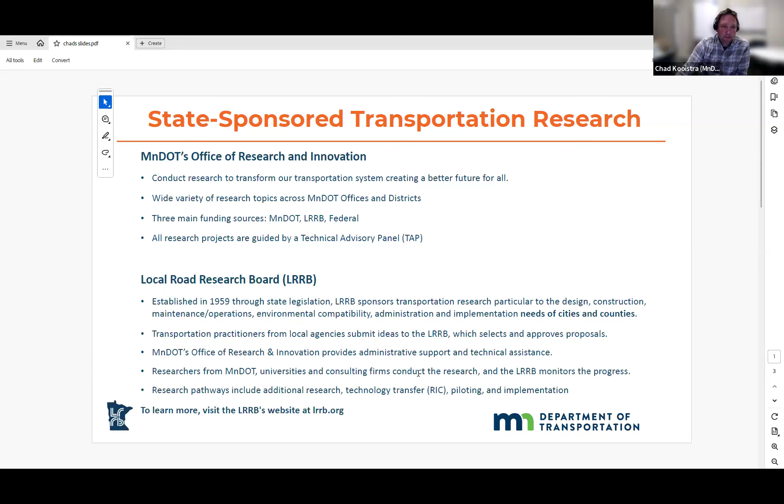Oh, okay. It could also lead to piloting and implementation. You can see more information at LRRB's website down there, and I'll put a link in the chat with that too.

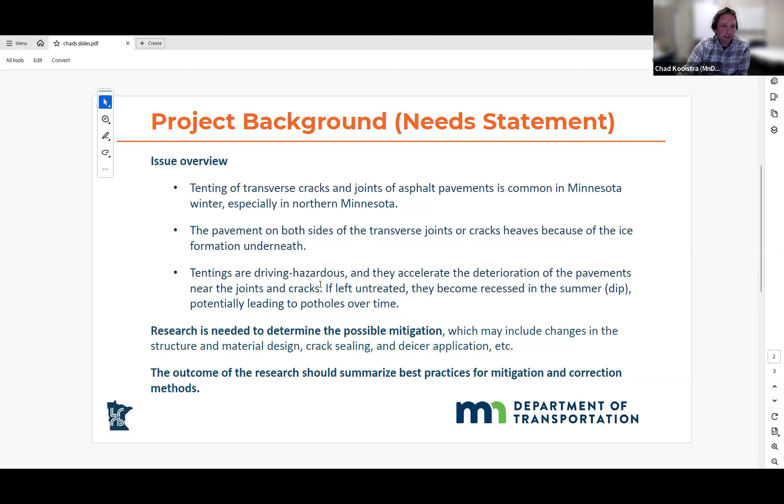This is just an example of, I won't go over this as Kristen covered it, and I'm sure the next 2 speakers will as well, but this project started as a need statement submitted to LRRB. And this is just the language from that need statement. So it gave an overview of the issue, stated that research is needed to determine possible mitigation, and then stated the outcome of the research should summarize best practices for mitigation and correction methods. So this was the need statement that was put in, and Professor Barman's team received the project.

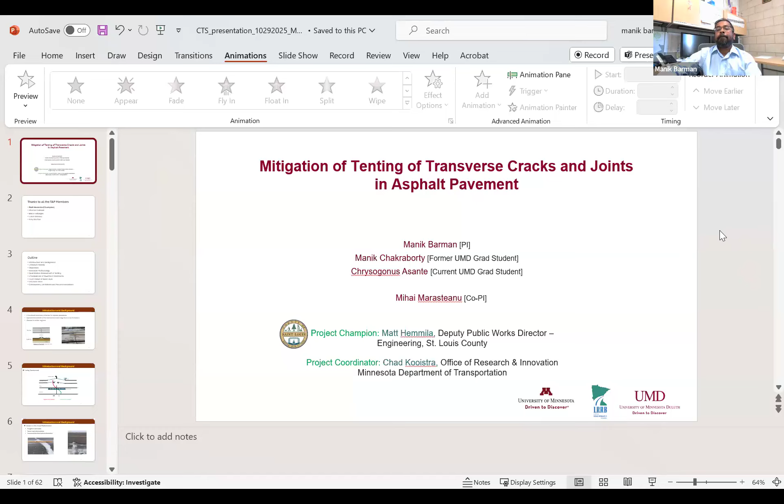So yeah, thank you very much for inviting me to speak on this particular topic, which we have been working on for more than a couple of years. I'm Manik Barman, a professor at UMD in the Civil and Environmental Engineering Department. I have two graduate students working on this project, and also Dr. Mihai Marasteanu from the Twin Cities campus is a co-PI. So his group also worked a little bit on this project.

Matt and Chad already introduced themselves, and they are heavily involved in this project. I'm not repeating the title because we already discussed it. I would like to thank all the TAP members who have been helping the research team in this project, timely reviewing the task reports and giving whatever suggestions we wanted from them. They have been very helpful.

So I'll start with a little bit of introduction and background, because we already heard some background about this project, so I may accelerate on these. We'll see a little bit of literature review, the objectives, research methodology, quantitative assessment of tenting, effectiveness of pavement treatments, and then frost heave of the base layer, decision trees, and then some conclusions. I would like to mention that this is an ongoing project. This project ends in March next year, so we have some tasks we are still working on.

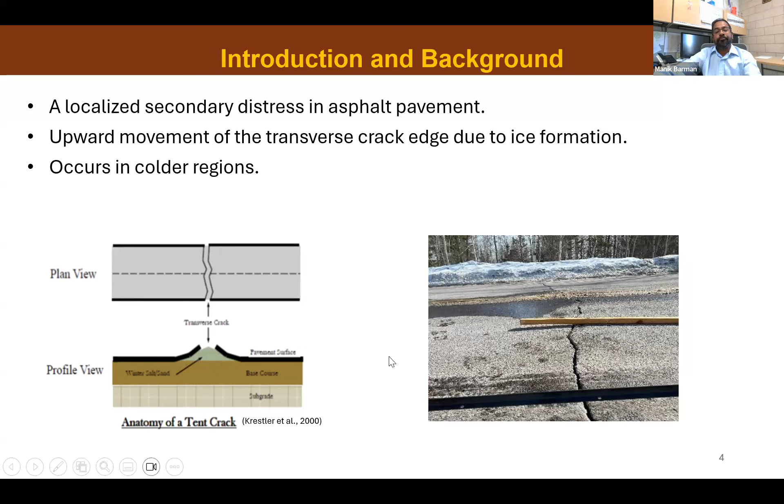So a little bit of science behind it. In pavement, if it is cracked, the water infiltration occurs either from rainwater, which goes in and then accumulates, and if it doesn't drain away, it can stay there. The snow melted water, the snow mixed with the de-icer that we use in Minnesota, that can go also based on the temperature gradient.

So in the winter, the top of the pavement is colder, right? And the bottom of the pavement is warmer. So moisture generally flows towards the low temperature region. So in this case, any water even below the subgrade can come into the base layer, okay? And then it can become ice, which can push the surface upward, okay? So this is a little bit of science behind the tenting development.

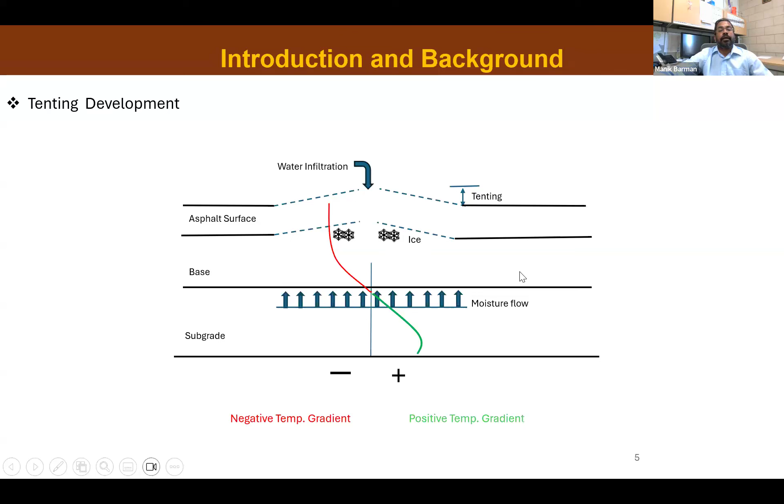Well, so the impact on the road performance, like all of us are familiar when we drive in the winter, we see that. So if we do not fix the crack, the edges of the asphalt pavement, if they are tented, they can break easily. The crack becomes wider, and potholes can form, right?

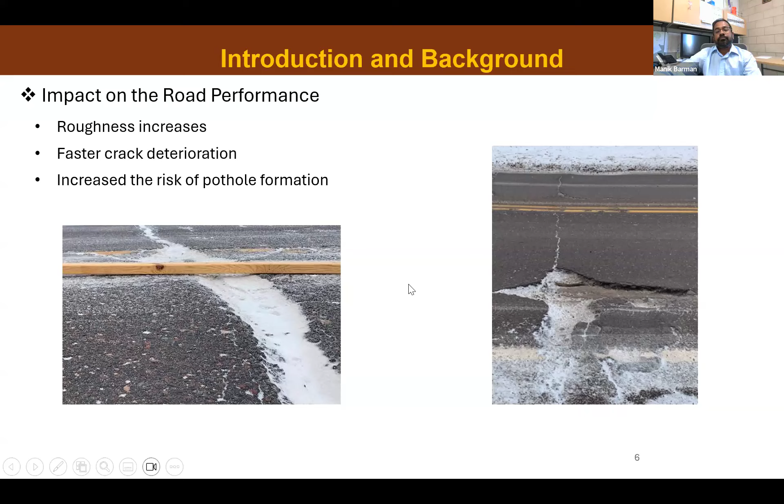So now some literature. This particular topic is not really widely researched. Probably less than 10 research papers or articles or reports we got in this area. So you can find hundreds of research in other topics, but this topic is not that researched yet. So infiltrated water, poor drainage, of course, these are the concern, these are the cause, and it's a near surface phenomenon. Near surface means near pavement surface phenomenon.

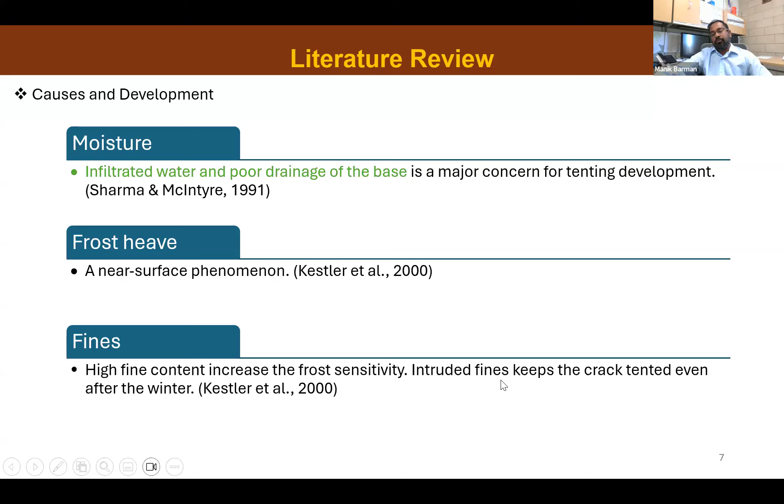High fines content increases the frost sensitivity, and the fines also, which go into the pavement through the cracks, they can also contribute to tenting. De-icing salt can also affect, because if the de-icing salt goes through the crack, the area by the crack will have more concentration of the salt, which will attract more moisture, which is a process known as osmosis, if you're familiar with that. So more moisture will be present, which can become ice.

Freeze-thaw cycles, of course, will affect. That's why in the early spring, when there is freeze-thaw, one day you see cracks are very tented if it is very cold; the other day, if the snow melts, then it goes down. And if freeze-thaw cycles are more, and if we have more moisture or the presence of snow, then tenting can go even more, because more water will come in.

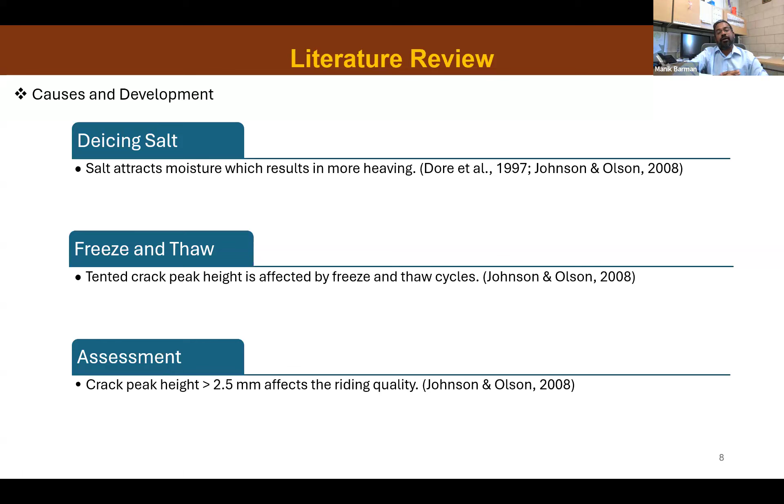Our colleague A.D. Johnson from MnDOT, and Roger Olson, a long time ago, did a study, and they found out that if the tenting height is more than 2.5 millimeters, it affects the riding quality. A couple more studies were done, one again at MnDOT. So what they have done, they measured tenting.

And then they also correlated tenting with the international roughness index. So the international roughness index, it represents, or it's a measure of, road roughness. A higher value is a rougher road. So as you can see, on the vertical axis it's peak height, or let's say it's tenting. So more tenting, more IRI. So there is a very good correlation, okay, with an R square equal to 0.62.

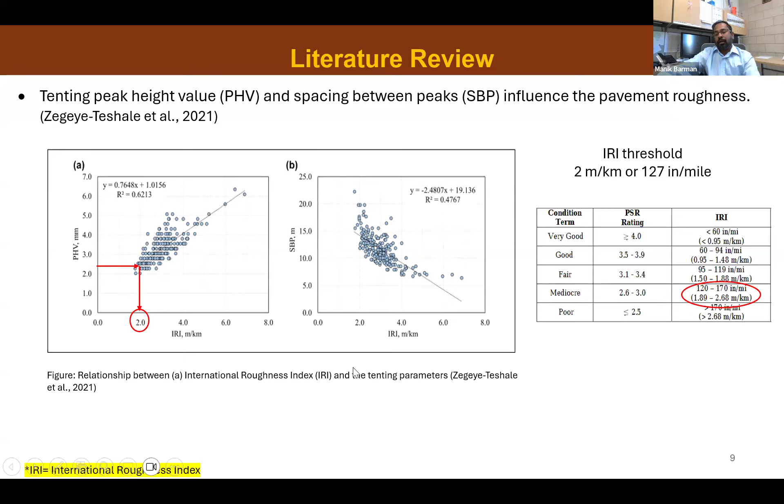So the objective of the study is, first, we try to understand tenting, how concerning it is, what kind of tenting amount. So in simple terms, a quantitative assessment of the tenting, how high they can occur, and if there are any variables that influence them. So we did that study. And then we studied the effectiveness of different pavement treatments that are used by MnDOT or in Minnesota by other counties or cities. And then we studied the materials that go into the aggregate base layer, which are susceptible to frost.

So we looked into that, and then we tried to see if we can change something in the base material which will decrease the frost heaving. Okay, and then based on these analyses, we tried to come up with some example decision trees.

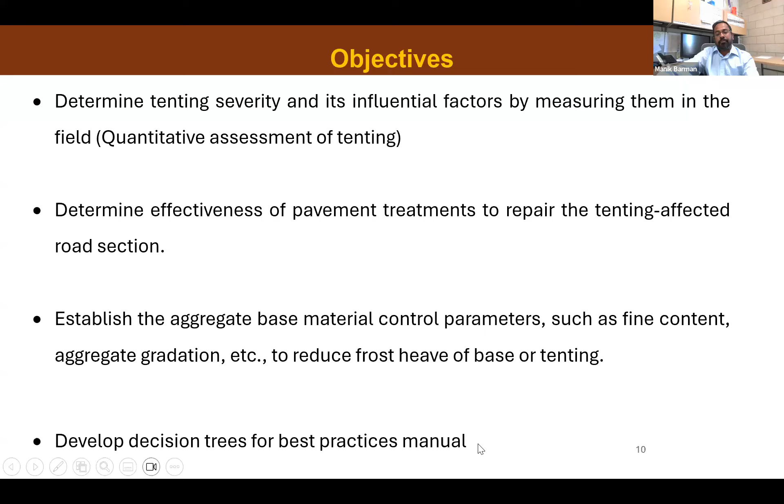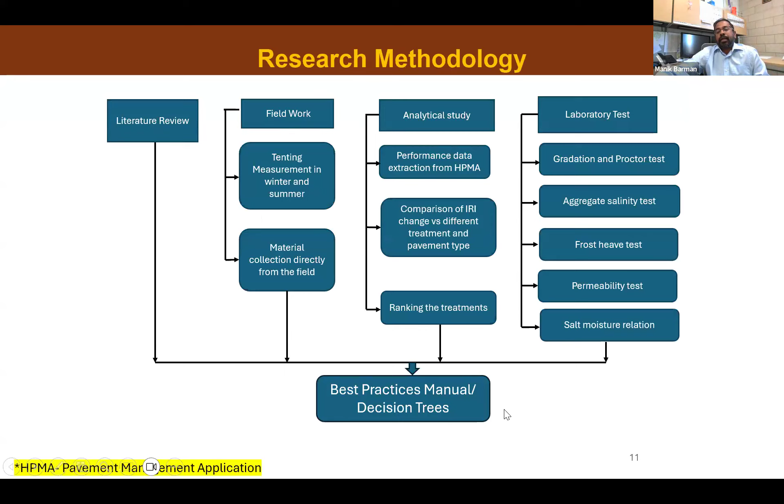But this, as I said, we are still doing some task, and this is the task. We just recently submitted a report, so the report is being reviewed by the TAP. So all of the results that I'll show are really preliminary. I'll not go through a lot, but this project had literature review, field work, some analytical study, laboratory test, and then eventually the best practice manual or the decision tree. That's our target. All right. So we will go through each one of those in this presentation later on.

So let's talk about the quantitative assessment of tenting. So we went to the field to measure the tenting, and also we used some data that is available from other research, especially from the Minnesota DOT, which my colleague Ayub and John presented in a paper in TRB. So I collected some data from that study too.

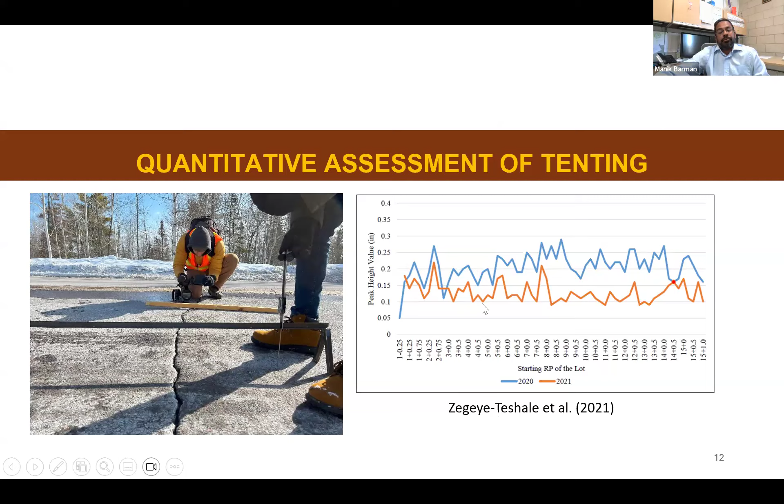So in order to measure the tenting, we really adopted a very simple method you can see here. We made this tenting measuring tool, like 4 feet long. And then basically we are measuring 3 heights, 1 height right in the middle of the crack or crack edge, and 2 other measurements on the flat road. And then we find out the difference between H3 and the average of H1 and H2. That will basically give us the tenting height. And then we took this measurement in 3 different locations for a single crack.

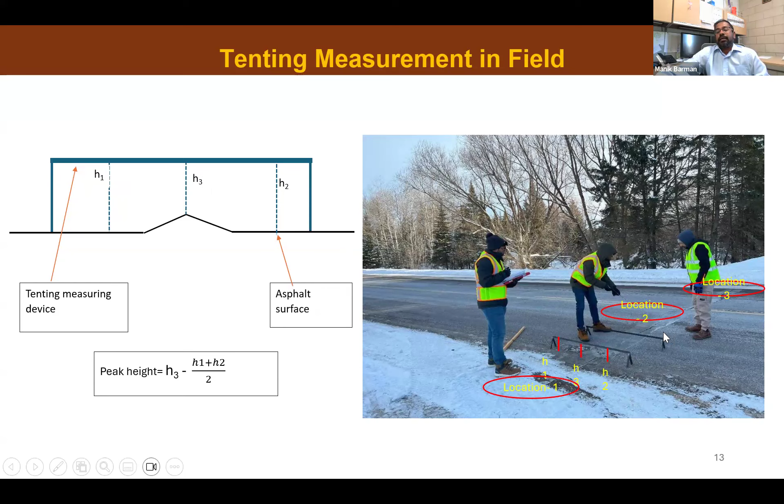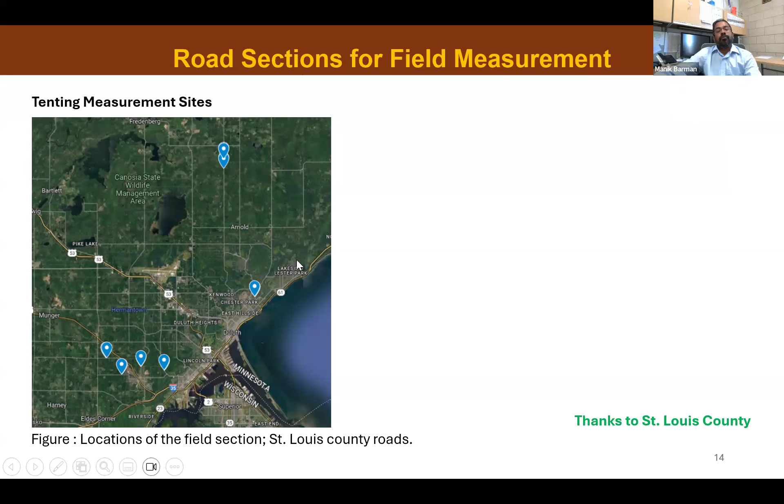And so with the help of St. Louis County, especially our project champion Matt and his colleagues, we got some sites to go and measure the tenting. So these are 6 different sections and their design.

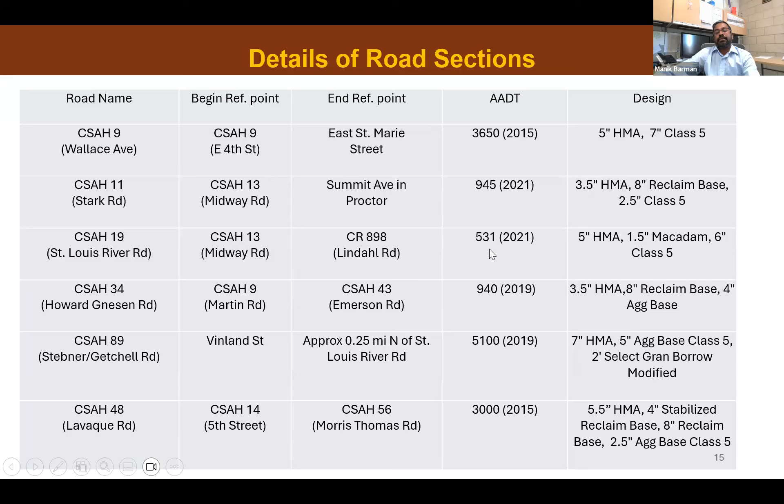All right. So I'll just read the last column. You can see we have very thin HMA layers, 3.5 inch to 7 inch HMA. Also the traffic varied from 3,650. Oh no, we have a 5,100 ADT as well. This is annual average daily traffic. Okay. So also 531. So this is kind of varied, and also the design is varied.

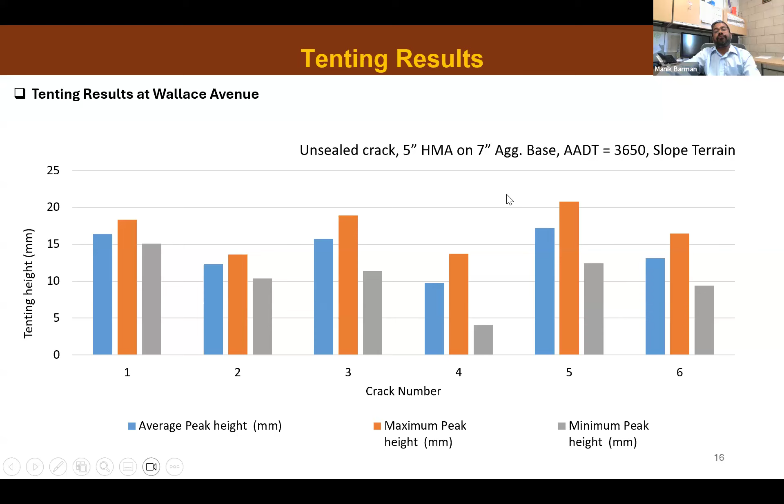If you're familiar with faulting in a concrete pavement, a 3/4 inch faulting in a concrete pavement is a lot. So in the winter, when we drive on an asphalt pavement that has tenting, the feeling is like you are driving on a concrete pavement that also has faulting. So in winter, you do not get a smooth ride on the asphalt pavement because of the tenting, especially in this part of the country.

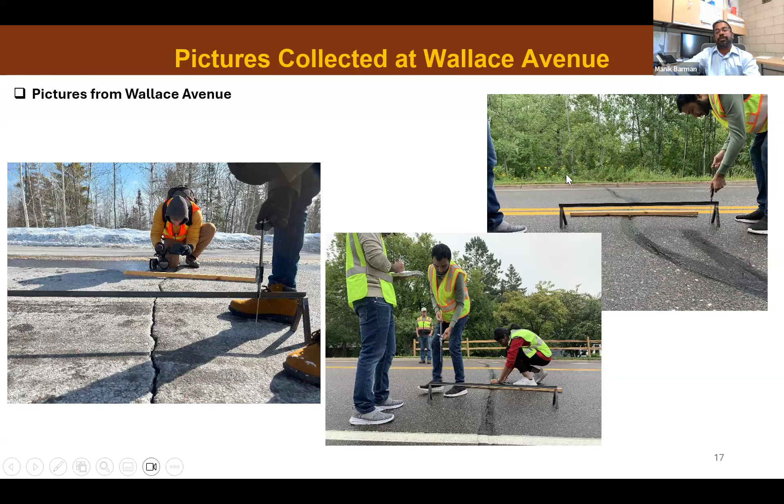So at this location, the pavement was really good except for the transverse cracks. And also it has a little bit of sloped terrain across. On one side it's downhill, on the other side the houses were a little bit up the hill. So water flows through the pavement in the transverse direction. So water can flow more, but if all the water does not go away, if the aggregate gradation of the base layer is not good, then it can result in tenting. And this is a really good example of such a case. We also went in summer. This picture is showing that on one side there is downhill.

So you can see basically here the pavement loses fines. It loses some materials, and then it just forms a little drain or channel. All right, and one project has a lot of very deteriorated cracks.

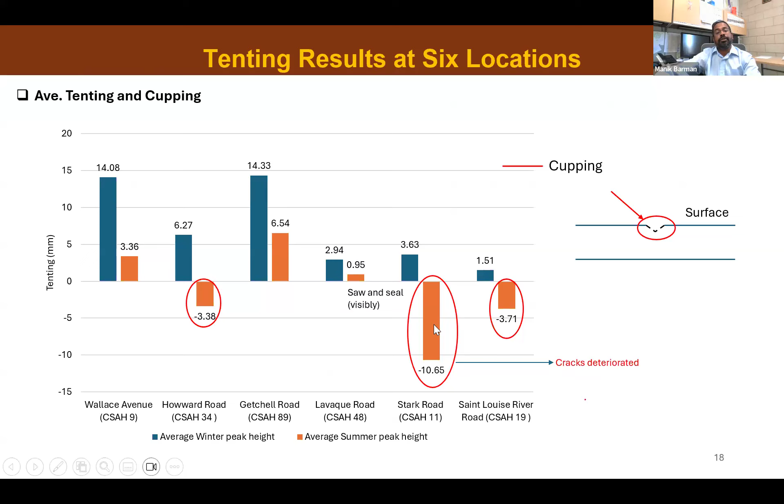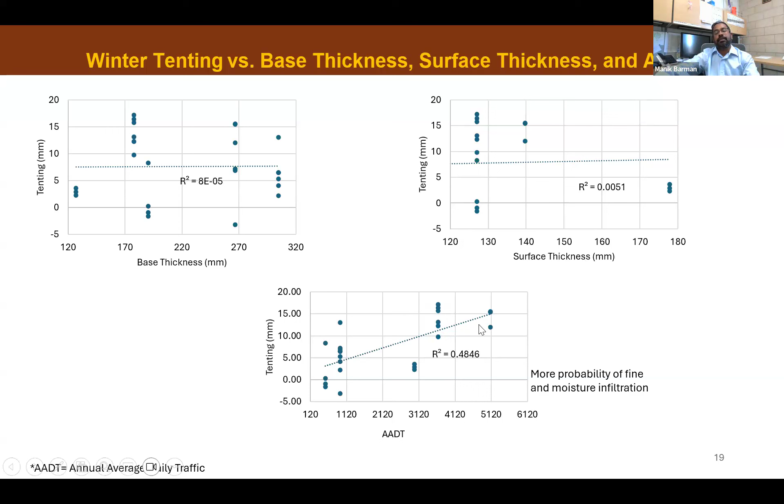With the traffic, we found out a little bit of correlation. More traffic showing more tenting. It's probably that with more traffic, more fines can go into the crack, or with the wheel repetitions, more water or the slurry mixed with the de-icing salt can go in, and that creates a little more tenting. So this is what we have seen.

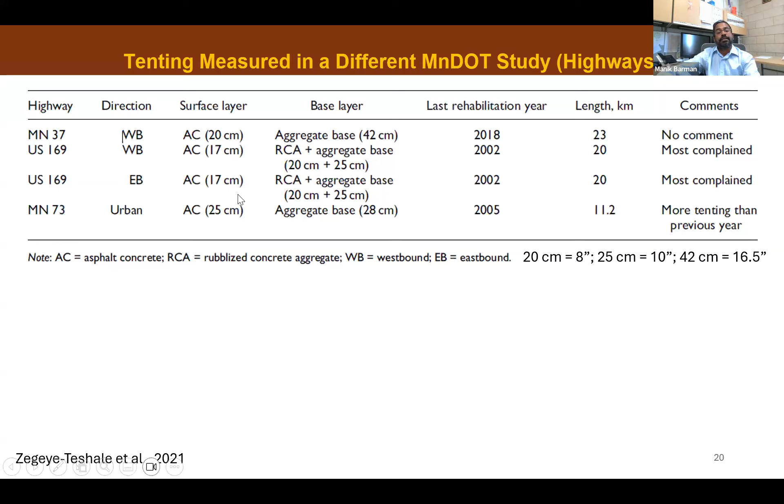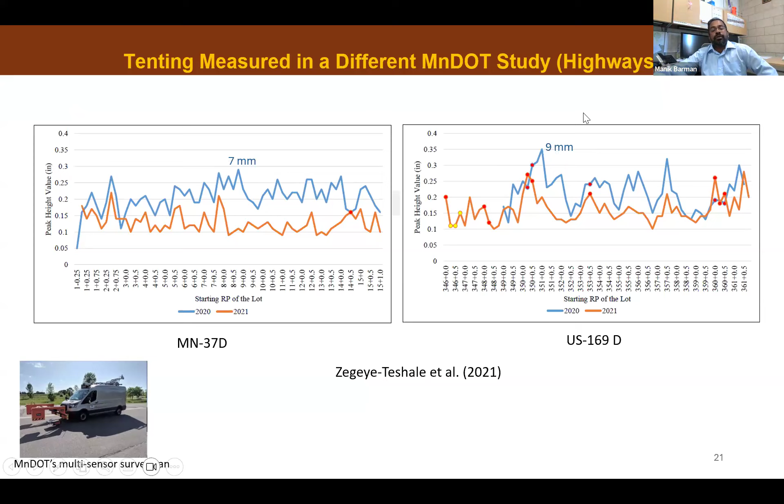So as I mentioned, we also reviewed a previous MnDOT study's results, where my friend Ayub and Eddie Johnson created an article, also published in TRB. They measured some tenting on a few highways under MnDOT District 1. And I briefly looked at the magnitude of the winter tenting they got. I presented two sections' results, and you can see 7mm, 9mm, which we also got. On Wallace Avenue I showed you we got 20 also, but 6, 7, 8, 9 were kind of the average that we have seen.

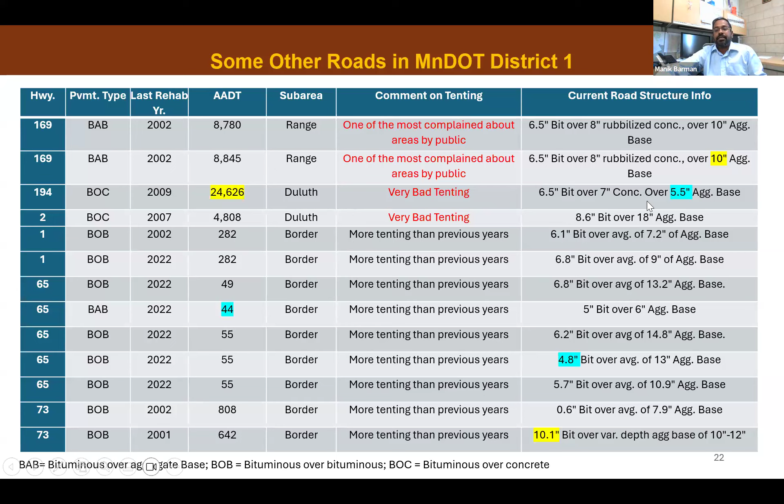All right. So after understanding how much tenting we can see, we saw 5 to 20mm or 15mm of tenting. It's very severe, so it's a concern for us, as Matt was also mentioning. This tenting is a concern for driving during the winter. And the learning is that it can happen on low traffic to high traffic roads, thinner to thicker surfaces, or bases too. The next is effectiveness of pavement treatment.

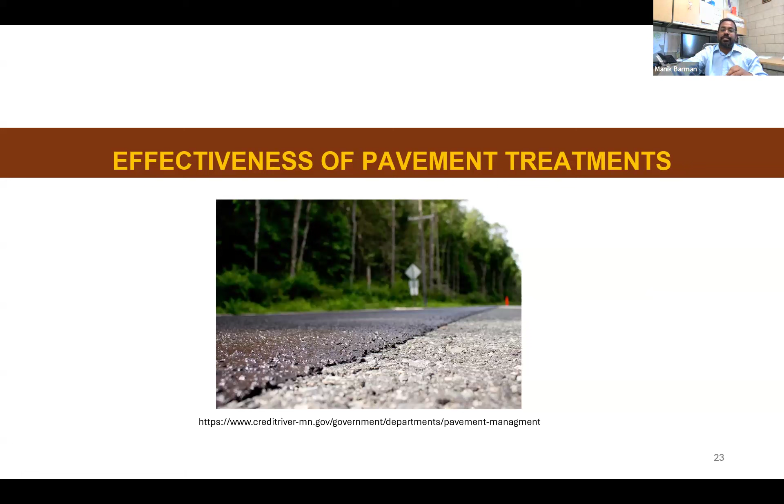Now, as I told you in the beginning, this tenting topic is researched less, so we really do not have a specific database where tenting is specifically addressed. So what we did here, with the help of our MnDOT colleagues Amy and Steve, we got data from their HPMA, the Highway Pavement Management Application, for 8 MnDOT districts.

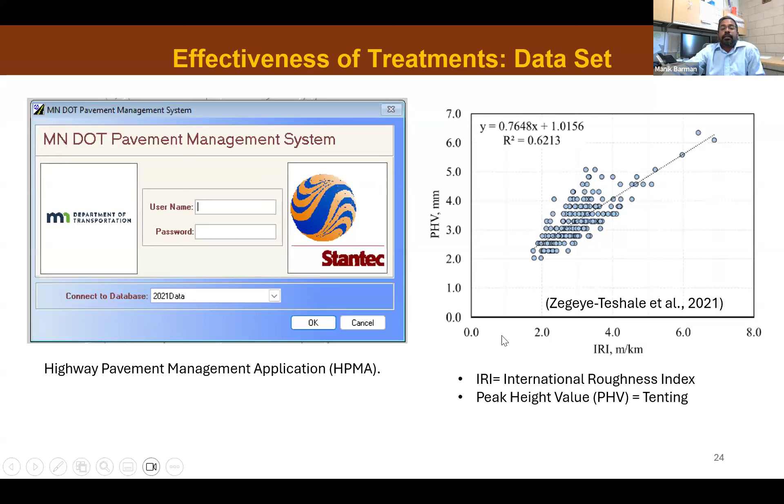The data we collected is the IRI, the International Roughness Index, and I told you IRI is a measure of road roughness. More IRI means more roughness, right? This database has plenty of data. So first, we trimmed the data to only sections which reported transverse cracking as the main distress. Transverse cracks will impact IRI when they are tented or if they're potholed.

Now, when they applied the treatment, it significantly went down. So this is just an example. In some examples the IRI remained the same. So what we tried to find out is the effectiveness of the treatment with respect to road roughness, and we saw from MnDOT's TRB report that IRI and tenting have a good relation. So we are assuming that if a road has significant IRI, that means the road was rough, and we are saying that roughness came partially from tenting.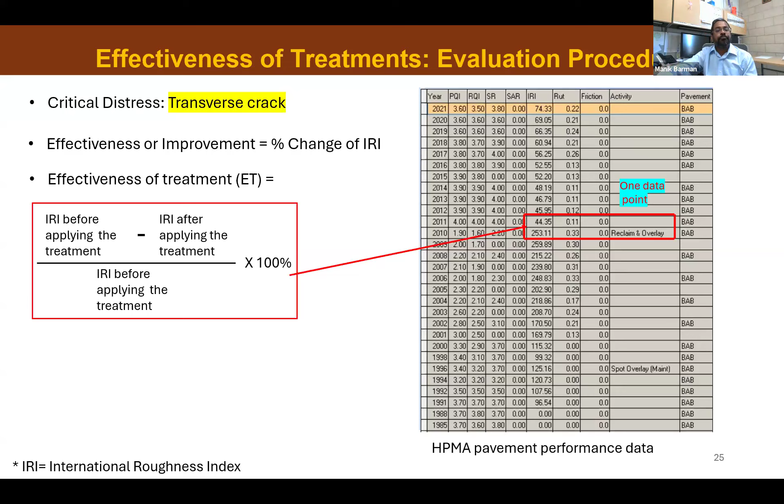So we had 8 MnDOT district roads, over 8,000 data, 3 pavement types and 6 maintenance or treatment types. Among the 3 pavement types, we have BAB, BOB, BOC. This is bituminous over aggregate base, bituminous over bituminous, bituminous over concrete. And then we had 6 different treatments. 4 of them are localized: crack filling, crack repair, crack seal, patching, and chip seal and micro surfacing.

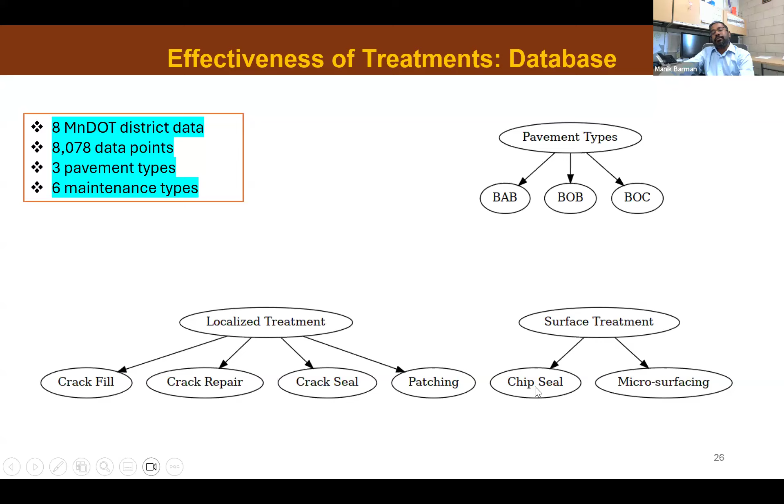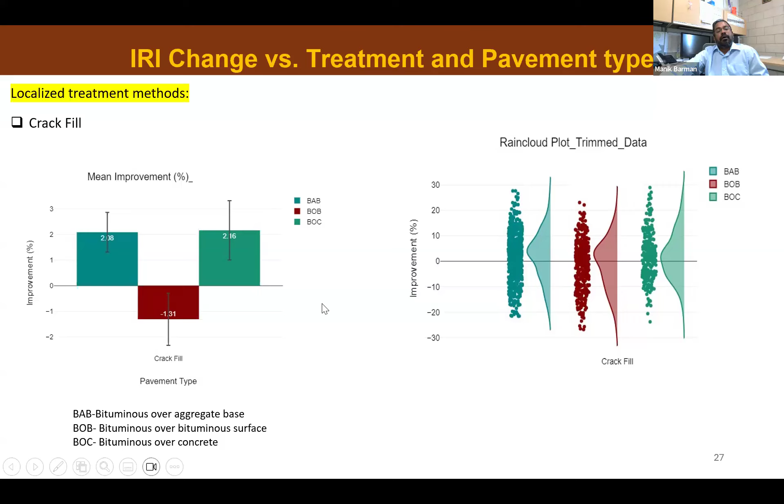So overall it looks like there is a little bit of positive contribution. If you took the mean of this, a 2.08% improvement was there. So that means IRI decreased after crack fill treatment by 2.08% on average, in all the projects which had crack fill treatment in this 8,000 database. Okay, so we did the same for other treatments, and I will not go through all of them.

So this was for the crack repair. For BOC, it looks like for bituminous over concrete, crack repair was very helpful. When you say crack repair, it's a little bit of extensive work, like cleaning the crack, drying, making the router, then applying the sealing, or if there is a little bit of other small work, that is also done under crack repair. So I checked the unit cost of crack repair versus, let's say, crack seal. It's almost twice. So crack repair is a little bit extensive, and in this MnDOT database, they're separate items: crack seal, crack fill, crack repair.

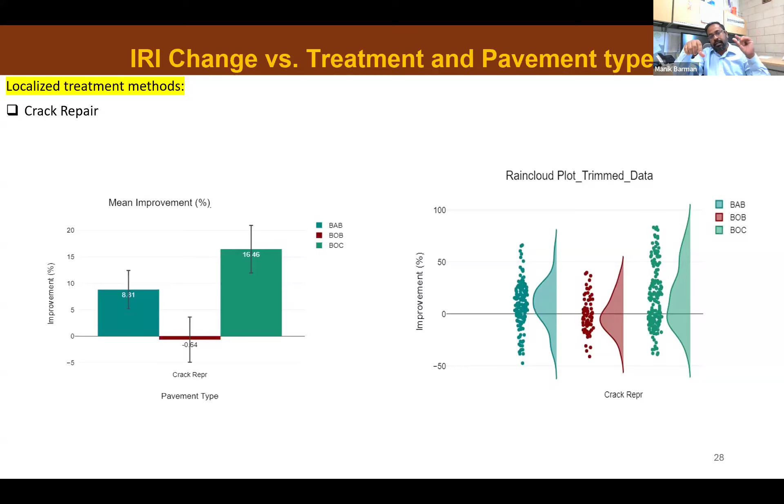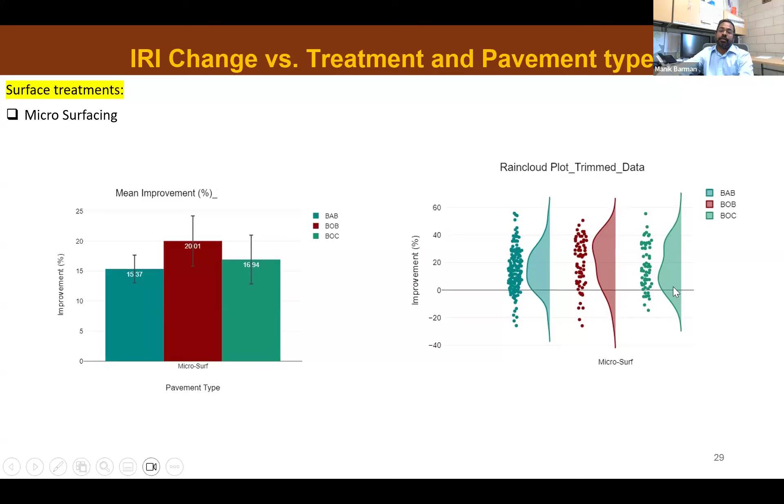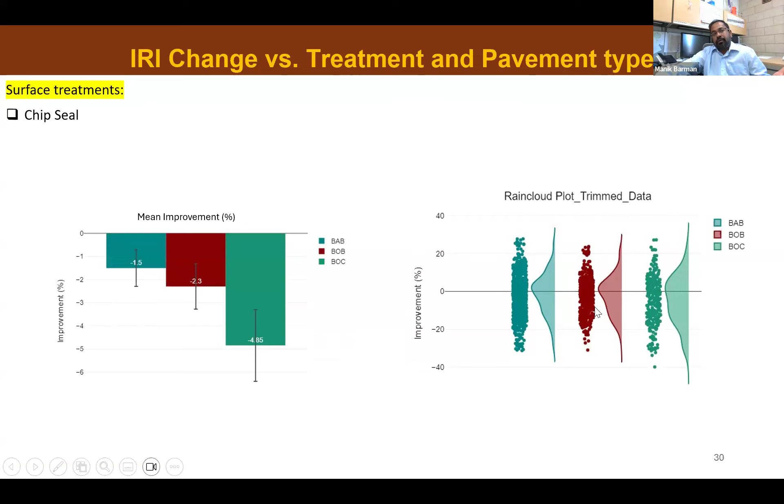Now, we already saw from our field investigation that the base layer thickness, surface layer thickness, and ADT didn't influence too much. Now, in this 8,000 database, we wanted to understand what the significant variables are. For that, recently we did some machine learning predictor models. So here, this is just an example of three different models, very high level results, basically to show that treatment type and pavement type are the two most significant variables.

Meaning the improvement in the IRI will depend on what pavement treatment you are applying. So not all pavement treatments will provide similar IRI improvement. For example, microsurfacing will give a lot, chip seal will not. And we also see it depends a little bit on the pavement type. So for BOC, if we use crack repair, then it was more beneficial than doing other things.

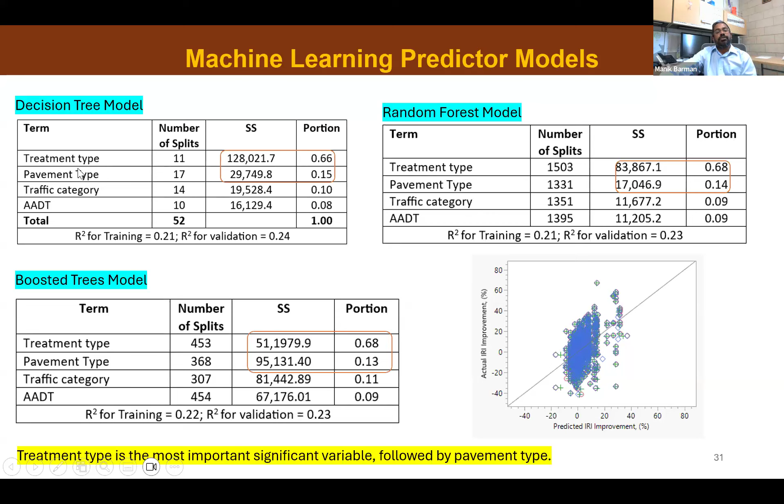We didn't have to do all three, but our student was a little bit curious to check, and one model is a little more advanced than the other. So he did all of them, and found that all the models show the same, that these two are the more significant variables. The next step was to rank those treatments.

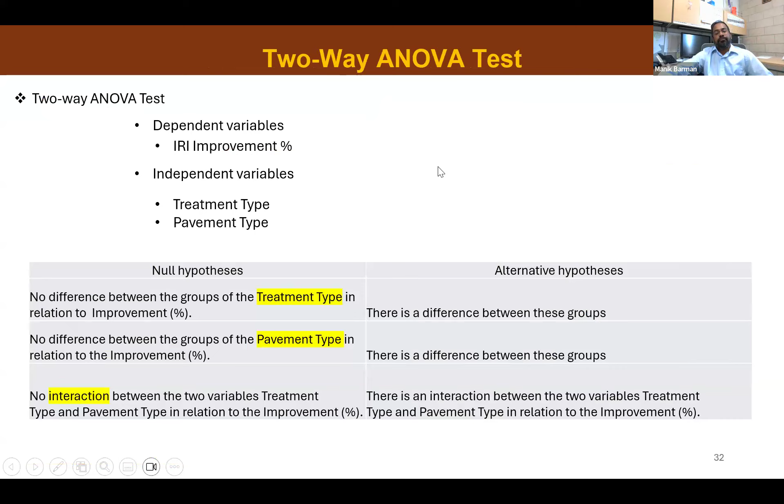Okay, now for doing that, we did a little bit more statistical analysis. We did a two-way ANOVA test, if you are familiar with that. And again, I will not read all those things, but this one also gave us the result that the treatment type or name and the pavement type are significant variables.

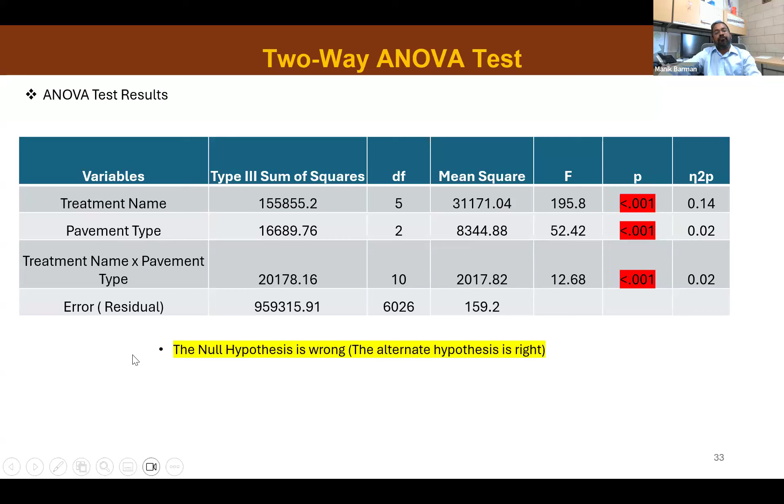And we did a little bit more work to rank them. There is something called the Bonferroni post hoc statistical test, which can be used to create a ranking. So we calculate some composite score, and based on this composite score, you can give a ranking. For example, for BAB, microsurfacing was giving the highest composite score. That means that performed the best, so we put ranking number 1. Second is patching. Again, these are all data available in the MnDOT database. Okay.

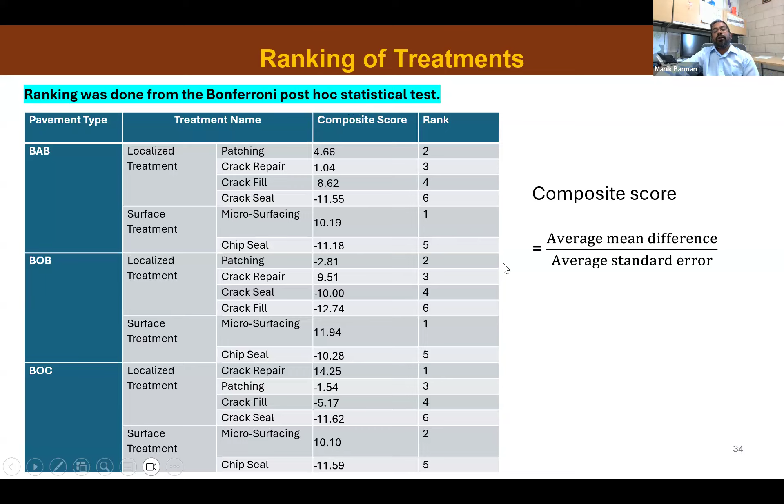So we understood which available treatments have been helpful in reducing the roughness, or indirectly the tenting which affects road roughness. These treatments you can apply on existing pavement to fix the issue, but we wanted to attack the genesis of the issue, the base materials, which are a big contributor to the tenting. If the base material doesn't drain away water, or its structure is such that it can store more or less water, this can affect the frost heave of the base layer. So we did an investigation on that.

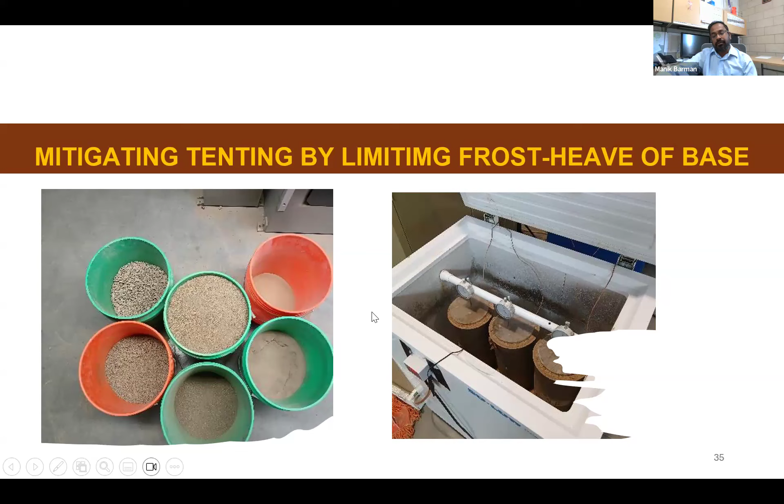In order to do that, we collected samples from 2 different plants here in Minnesota, Duluth: Oscar and Northland Pit. And then my student just gave them the names. I know O is for Oscar, I don't know why he said S. I didn't want to disappoint him, so I kept them. This N is North. We collected in 2 different times, so he added another N, which is for new.

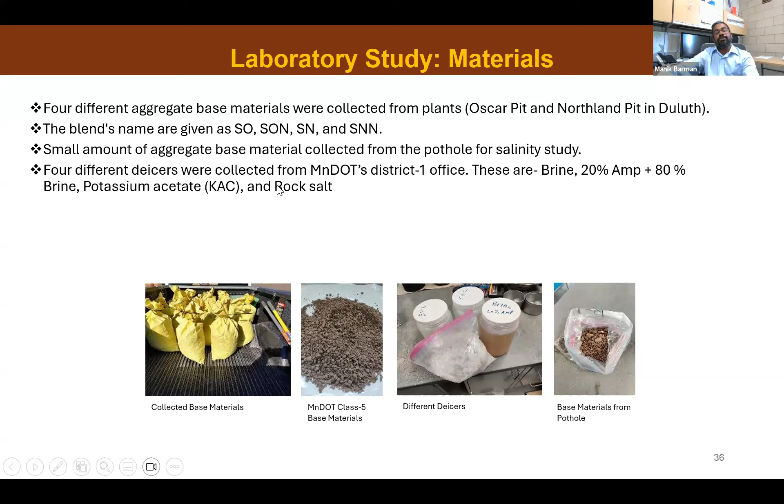We also collected some base material samples from potholes around Duluth to study the salinity level, because we use de-icing salt that goes into the base material and increases the salt. We took permission from the City of Duluth for that. And we also collected some de-icing materials like brines, what is being used by District 1 MnDOT.

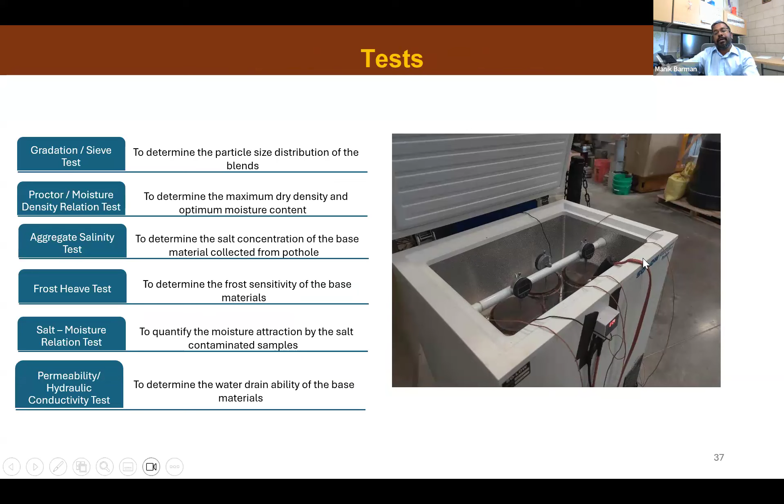We did different tests. I'll jump into the results, but the most important test we developed is for the frost heave, and we developed these tests from scratch. Everything is our thought, and we developed a method which can measure frost heaving in the lab environment. So this is the gradation of the four soil samples, the original gradation. We also did some changes in the gradation later on, but these are the gradations we got.

So out of these four, the Oscar samples, SO and SON, have around 15% fines. We collected these samples in 2 different years, probably from the same source, and you can see for the next year's one, when we did the sieve analysis, we got almost the same. For these ones also we got the same, even though the gradation was different.

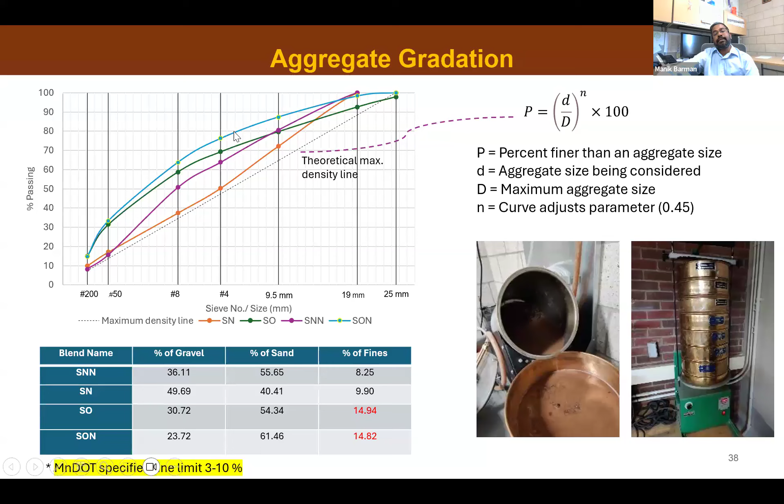So this SN aggregate was pretty close to the maximum density line at the lower, or fine, side of the gradation. The SO is far away from the maximum density line. The maximum density line is this theoretical line. If the gradation is closer to this line, the soil or aggregate base layer will be more dense. So this SO or SON line here says that it will have pores; it will not be as dense.

So in this study, we proposed a factor called the CV/FV index, which is coarse void area by fine void area. How did we find this? We basically used the gradation curve, the maximum theoretical density line and the gradation. We divided this entire area into two parts: the area below sieve number 4 is fine void, and the other one is coarse void. So coarse void by fine void is the CV/FV index. If it is greater than 1, the coarse void is more, big size pores are more; if less, fine void area, fine pores, are more.

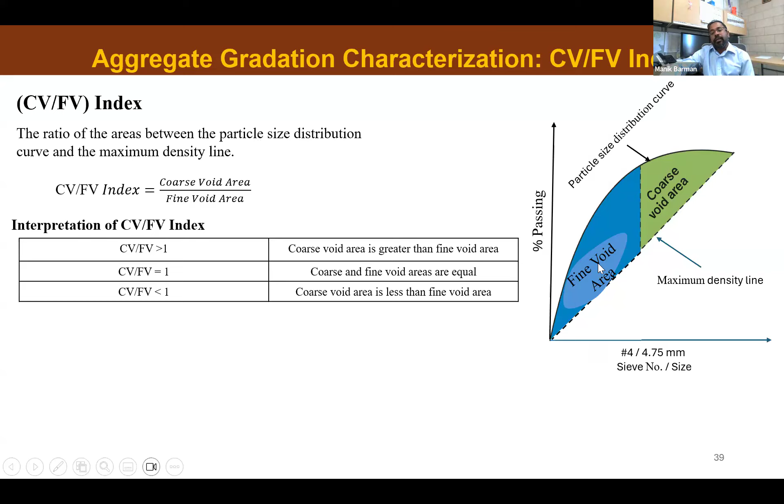All right. Now, when we analyzed the gradation of each, we calculated the corresponding voids: fine void, coarse void, and the total void, and then we found the ratio of CV by FV. Here, I'll jump into this one. You can see that SN had the highest. I don't want you to remember that, but we'll come back to this after some time. So SN had the highest CV by FV.

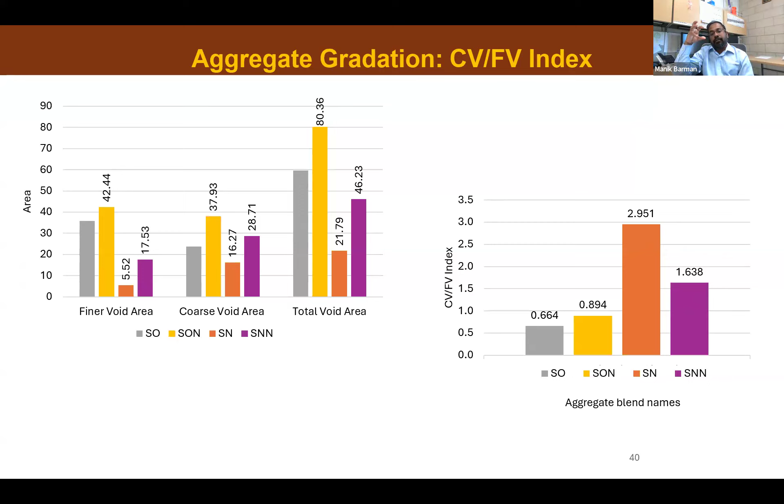It means if we compact this, the aggregate structure is like that. It will have some big size of pores, holes in the structure, and the small pores will be very few.

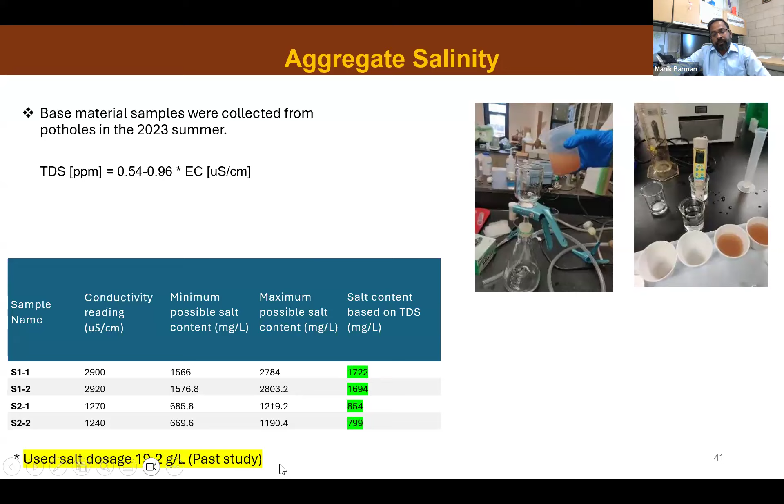From the samples that we collected from the potholes, we found out the salt content for 4 different samples. But we also reviewed the A.D. Johnson study, and the amount they had was way more than what we got. So we basically stuck to what they measured, because we wanted to see the worst scenario.

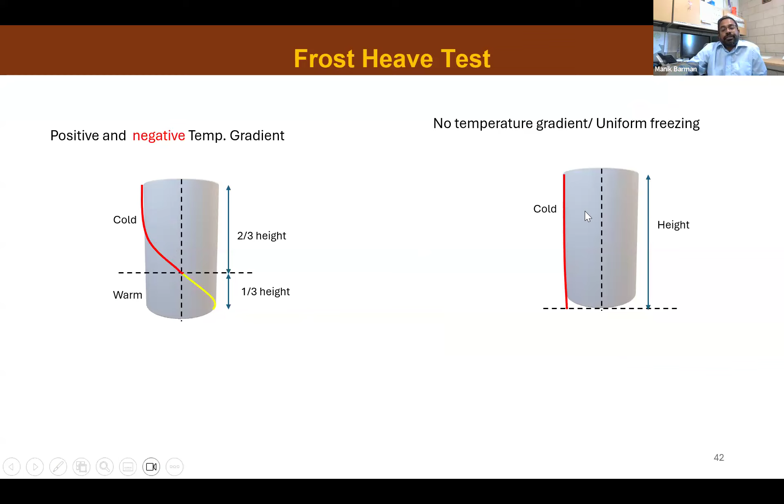So for the frost heave test, we did 2 different types of test. In one test, we really tried to mimic the field situation. So here, let's say the base layer is cold at the top and not cold, or a little bit warm, at the bottom. So we tried to create that gradient, and in the other one, we just made the entire base layer frozen.

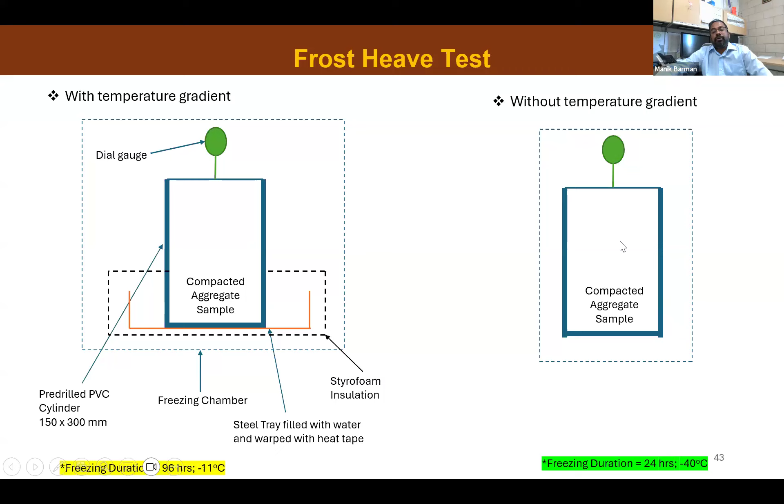So for doing this variable temperature thing, we had to do a lot of arrangement here. So this is like a temperature chamber, and at the bottom 1/3 we provided some heat. We had water in here and the heat, and this entire thing was in an environmental chamber. And we got minus 11 degrees Celsius at the cold region for that. But in the other one, we got minus 40 degrees Celsius, pretty close to minus 40 degrees Fahrenheit. So in this one, we just kept the chamber really cold and uniform.

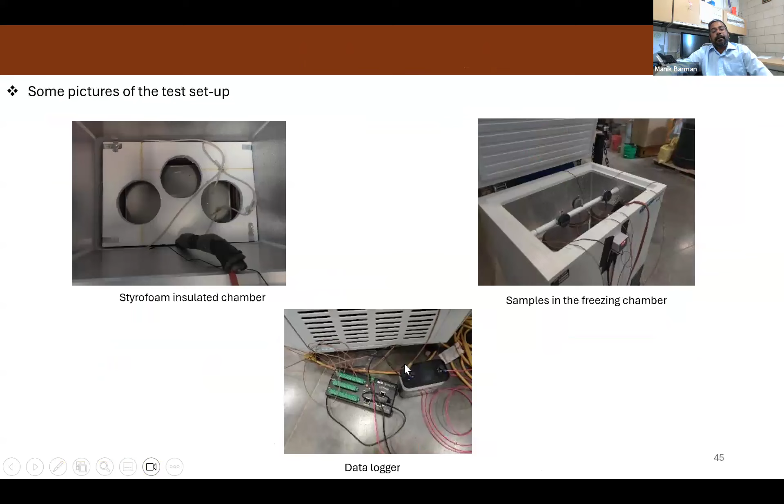So these are some pictures of the test, sample preparation and all, and also we had thermocouples to measure the temperature. So these are some more pictures.

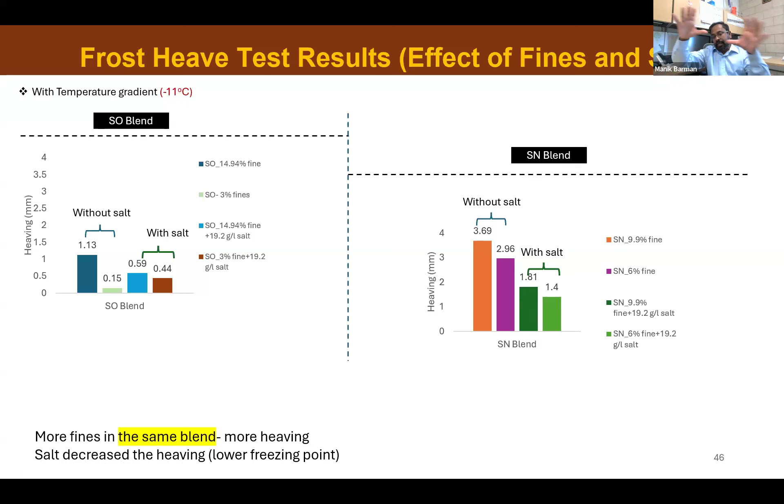But with salt, we thought there would be more heaving, because we thought the salt would absorb more water, but it did not happen. And on the SN blend also, we did without salt and with salt, and the trend was the same. So with salt we were getting less heaving. Now the literature says if you have more de-icing salt, you should see more heaving. That's correct. If the salt really absorbs a lot of water, then you will see it, because water accumulation is more and ice accumulation will be more. But in our test platform, we found that doesn't happen.

I'm not saying in the field, but here, in order to prove that, we just kept some samples here, each with the highest amount of salt, and then we had some water in here to see if this base material absorbs water. It did absorb, but it was negligible, like 0.03, 0.02%.

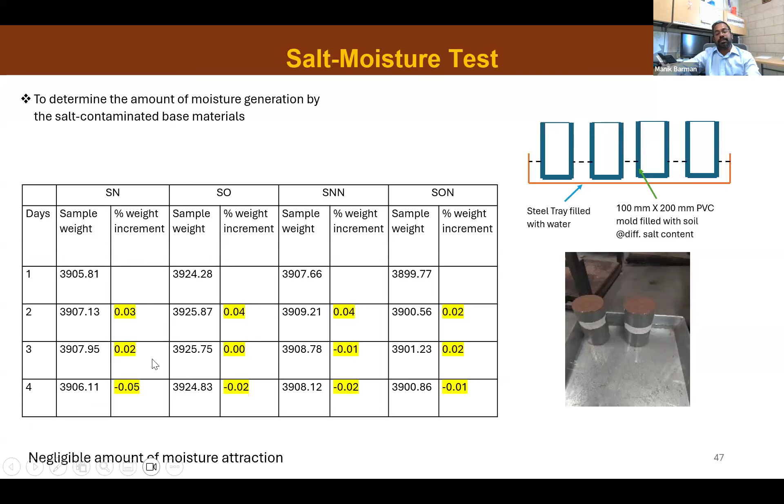Okay, so after that we thought, if we are just studying the base material's gradation or aggregate structure, then we probably should not add the salt. And also we tested these at minus 40 degrees Celsius, so at that temperature the effect of salt is not there. And we did the measurement.

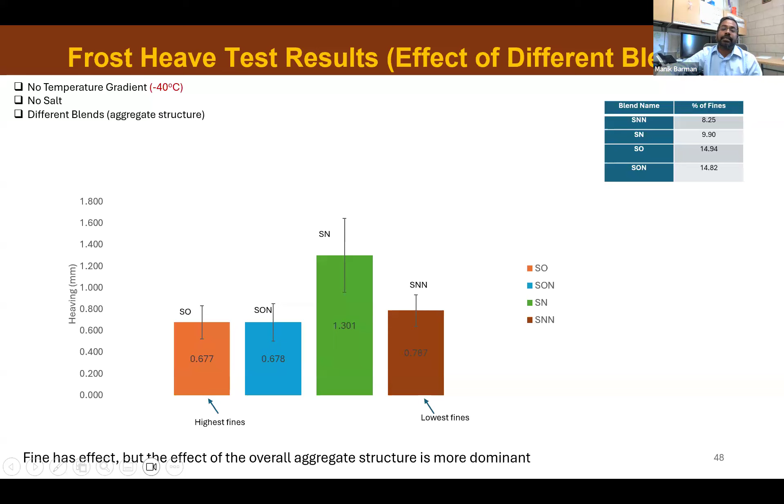Of course, more permeability means more space for water. It will also create more frost heave, but that's kind of the tricky part here. But more permeable means better drainage. So if you have good permeability, the water may go away. But if you have a highly permeable base, but the pavement doesn't drain away the water, then it's a problem. Then it will create more tenting.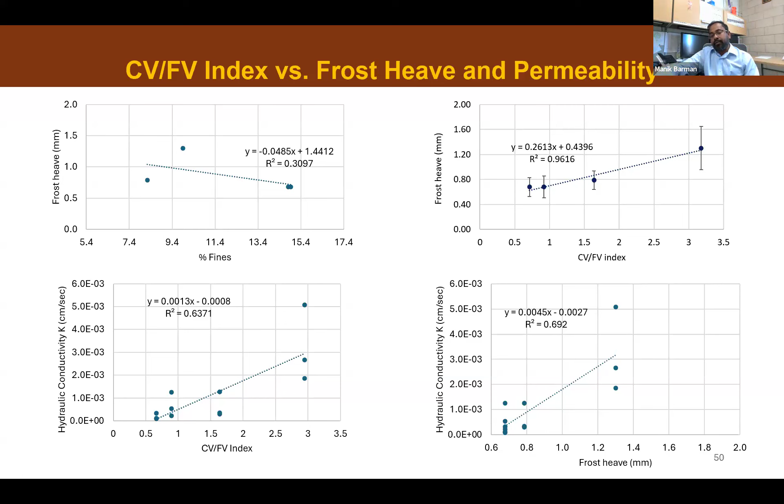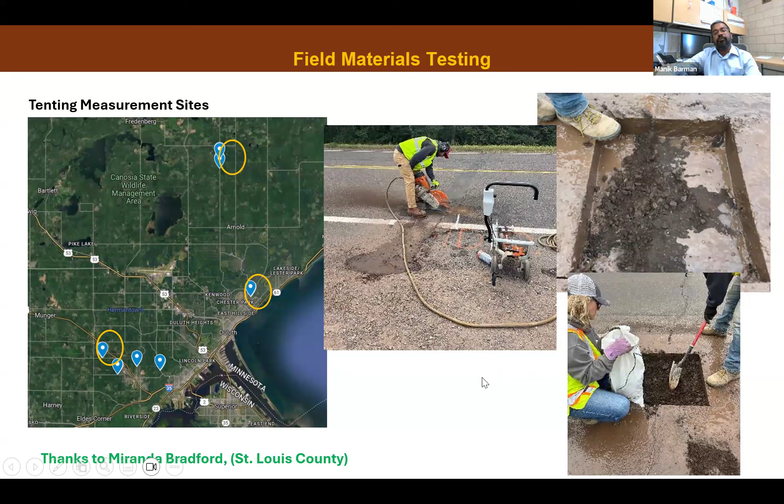And next we went to the field. Out of those many locations, we went to 3 different locations, including Wallace Avenue, where we saw a lot of tenting. We collected some base materials, thanks to Miranda from St. Louis County and another colleague from St. Louis County who helped us. Now we analyzed those, and we found out the fine content is 10% or below, so within the MnDOT boundary.

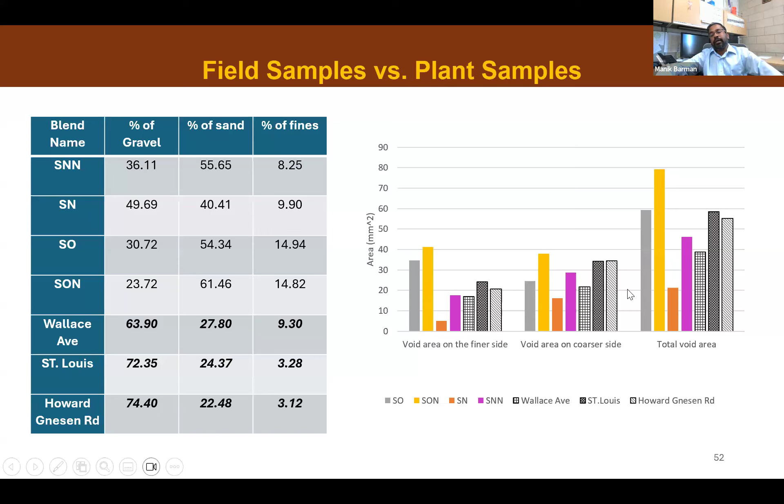Now here we did the analysis of the void. Okay, so let me go in here. This is the most interesting thing. So in those 3 locations, we had the average tenting measurement. In Wallace Avenue, we had 14.08 average. Now in the frost heave test, the frost heave value was also the highest among the 3, and you can see it is clearly following: more tenting, more frost heave; medium tenting, medium frost heave. This is a very good trend, but the limitation is only 3 data points, so our confidence is not that much here.

And with the 3 data points, I tried to relate again; this is a premature correlation because it's only based on 3 data points. So this is one of the limitations of this study. I could see an exponential relation between field measured tenting and lab measured frost heave. So they have a good relation. So the frost heave test setup that we developed at UMD really can capture the frost heave potential of the field. These results gave us really good indications, but we just need additional data.

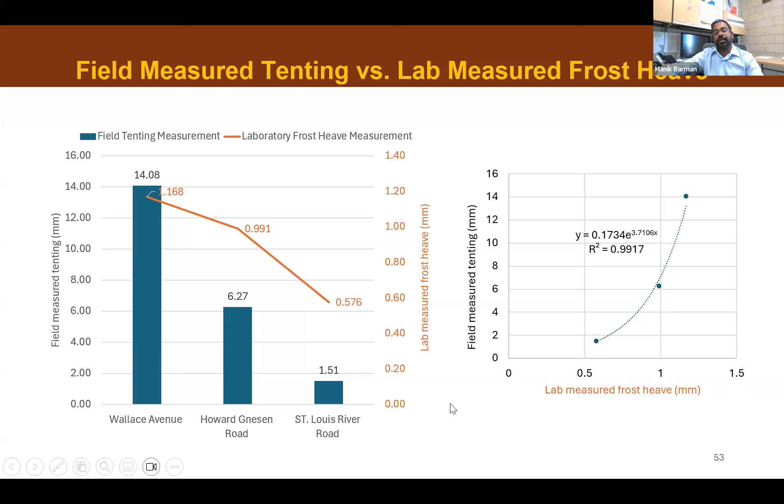Now, we wanted to correlate the lab measured frost heave or the CV/FV values with the road conditions if we want to implement that. I took help from Zegeye-Teshale et al.'s study again. They did a great job. They correlated the pavement condition, road conditions, with the tenting. Less than 2.5 they said good, 2.5 to 4.4 they said moderate, and then greater than 4.4, sorry, it should be 4.4. I thought I corrected it.

Now, using the correlation that we developed in this study, we found out that if you want to have a good road with less or no tenting, the lab measured frost heave should be less than 0.72, or CV/FV should be less than 0.88. Corresponding to these values, we calculated the lab measured frost heave and CV/FV for the others. So what do we want when we construct the pavement? We probably want to achieve this one, 0.88, right? If we can achieve 0.88 in the base material, that will be a great thing.

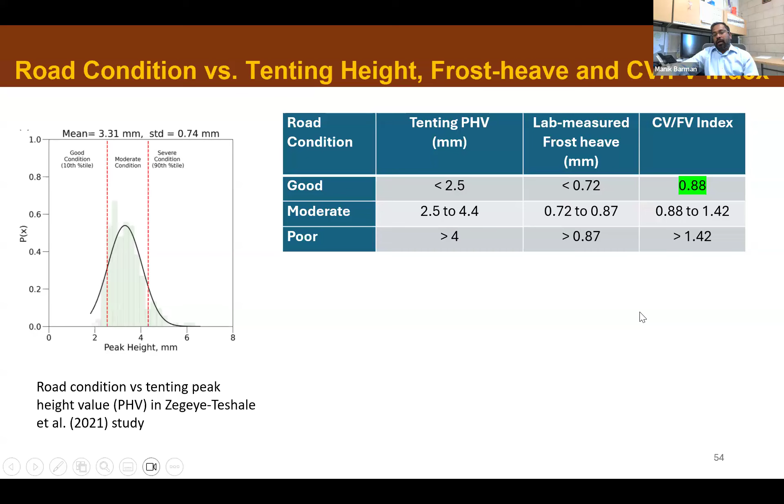Coincidentally, we are not alone in this; a similar approach is already applied. If we look at MnDOT's concrete pavement recommendations for air content, entrained air content is 5 to 8.5%. So what is entrained air content? The finer air bubbles. We want 5 to 8.5%. Why do we want those finer air bubbles? They can provide some space for ice. When water becomes ice, it needs extra volume, and these finer voids can provide that. That's why we need air entrained concrete.

Look at brick masonry. There are also different grades, but they have a coefficient called the saturation coefficient, and the target is 0.8 to 0.9. So 0.8 means it should be less than 0.8, and this saturation coefficient is pretty close to our CV/FV index. Why? Because the saturation coefficient is the ratio of absorption by 24 hours submersion in cold water. If we do the water absorption using cold water for 24 hours, that actually fills the pores, the big size voids.

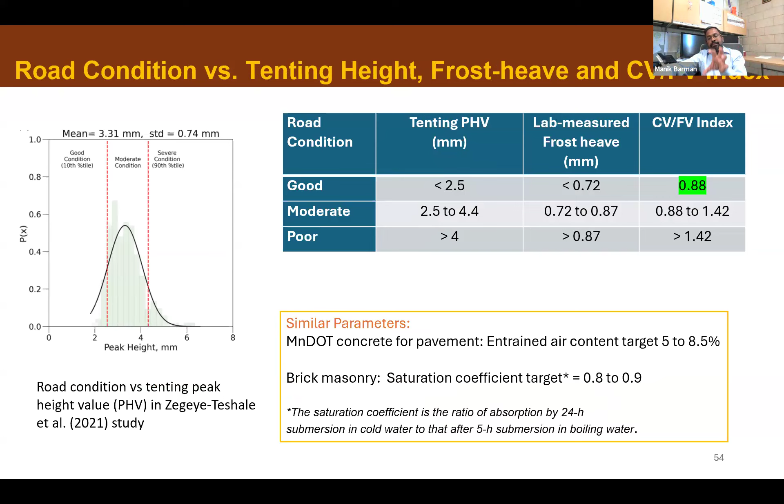All right. Now, even though the data size is limited, we came up with some really not cool, but a very draft level of decision tree. And as I said, this is an ongoing work. We just submitted the report. The TAP didn't review it yet, but this is what I proposed. Again, this will be kind of changed based on the opinion.

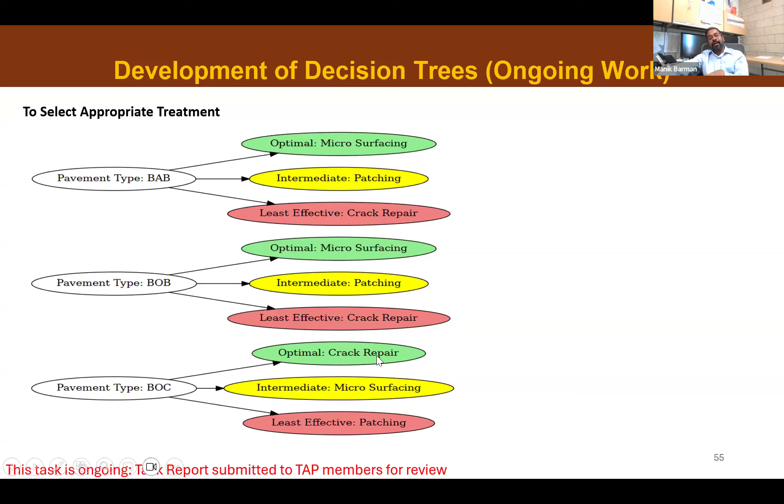So if you really do not separate between surface treatment or localized treatment, we see like for BAB, if there is tenting, microsurfacing is really great. Okay, but now if you want to do localized treatment, patching should be good. Microsurfacing again stood out for the BOB. BOC, which is bituminous over concrete, right? We have so many roads in here. So for that, crack repair, like extensive repair of the crack, was found out good.

Now, if you want to say, okay, I want to divide the surface treatment and localized treatment. Now for pavement type BAB, microsurfacing was very helpful. Microsurfacing for surface treatment is true for all three types of pavement. So microsurfacing really did a great job, I mean, like great job in those databases. But for localized treatment, it's somewhere patching or crack repair.

So again, this is another proposal we have. We do not have a lot of variables here, so it is not a very big decision tree. It can even be made a little bit simpler if we do not include the second choice. Or we do not have a lot of options, so maybe we do not even need a decision tree. But anyway, this decision tree was for fixing existing pavement, right? So this is for existing pavement which has tenting issues.

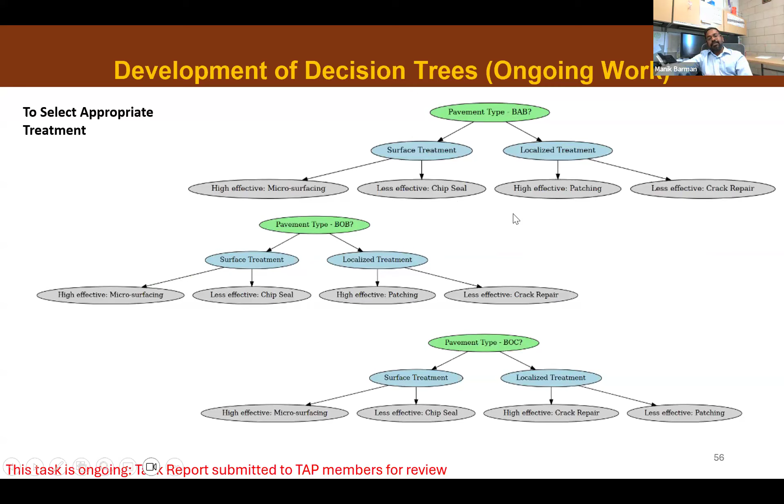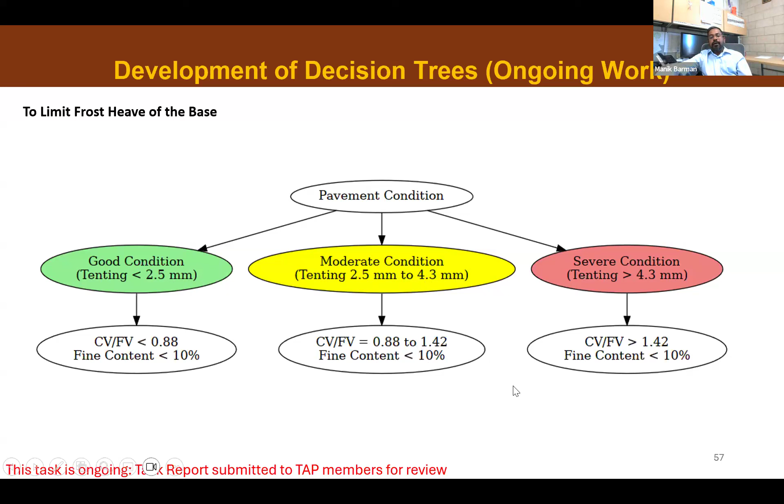All right, so in the conclusion, I'm not sure how good I am on time, sorry. So the tenting we saw is a concern, right? And it increases the road roughness. IRI and tenting, we found there is a good relation between these two. So while 2.5 is kind of the value they mentioned that affects the ride quality, our Minnesota roads can have 15 millimeters of tenting, which is the reason our driving in winter is not smooth. Okay.

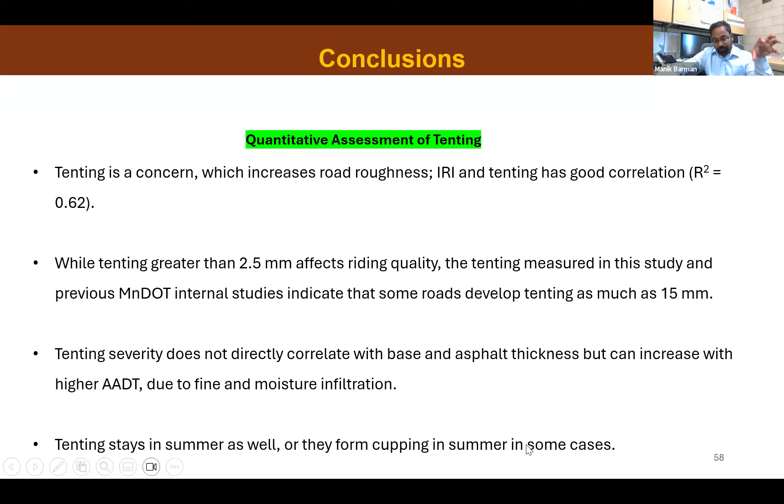So when we saw the tenting severity, from the data that we had, it was really not a function of the base or asphalt thickness, but traffic could increase that. And we saw tenting can stay in summer as well, because if extra fines go in, they stay there, or it can also result in cupping. When this thing happens, maybe the crack is already deteriorating, the asphalt material is also getting lost, the crack will be wider.

For effectiveness of the surface treatment, we saw microsurfacing is way better than chip seal, data-wise. For effectiveness of the localized treatment, we saw crack repair was good for BOC because it is like an overlay on concrete, and for the other two, patching was again showing a good result in the database.

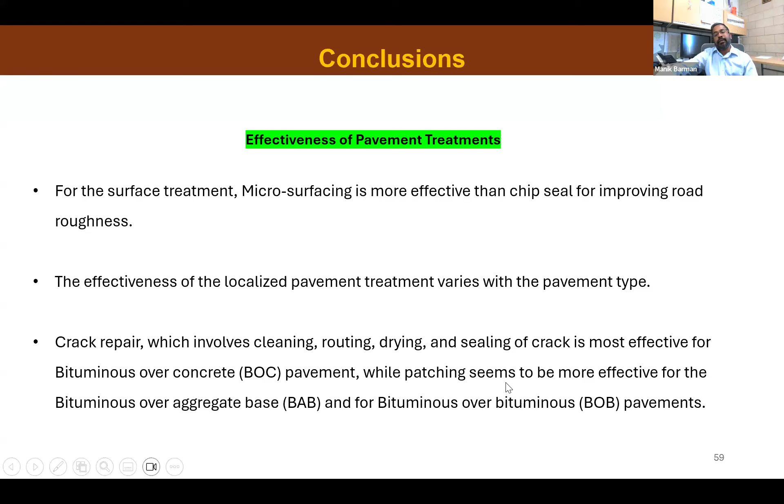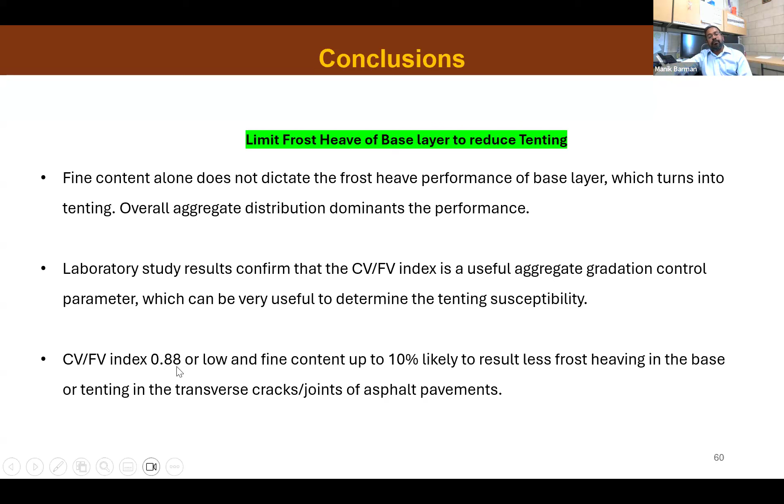And I'll not read all of them, but for CV/FV, you saw that that's really very useful. That's the parameter, in addition to the fine content, we should be looking at. That can give us a very good engineering standard. So if we control that one, we may see less tenting in the road. But again, this is established based on a very small data size, which I mentioned in the limitations.

So I'm not going to read all of these things, but in simple terms, I'm just saying that the database that we used is a little bit small, especially for the CV/FV index versus frost heave and field tenting. For this relationship that we established, the database is very small. To implement such a new parameter in practice, additional research and further laboratory testing and field testing is recommended.